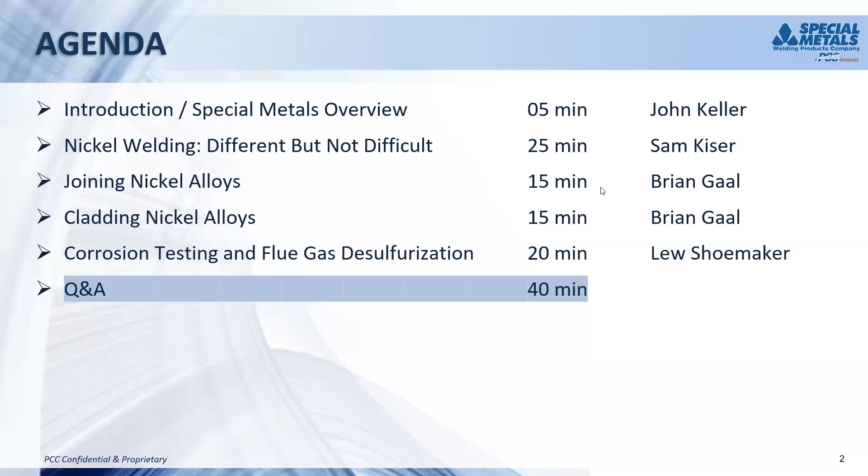Special Metals has been around for over 100 years. On the welding side and on the manufacturing side of the high temperature nickel alloys, we are a leader and innovator, and we continue to innovate over the years and into this new 21st century that we're pushing through. It's something that we take great pride on, but also not just our quality and brand of our material, but the technical expertise that we have and we instill and we put in every day. And I think you'll be able to get a lot out of that through both the presentations and the Q&A session from our technical team, Sam, Brian, and Lew. And so we hope this is a very beneficial opportunity for everyone, and hopefully we can do this more going forward. So without further ado, I'm going to go ahead and play a quick intro video here.

You are playing the video? John, is everybody seeing the video? Yeah, no, you started. Are you able to see it? No, not yet. John, you might want to stop the share and reshare the screen with the video link. So if you're playing the video, stop share and reshare because we're just seeing the presentation. Okay, stop share and then reshare the video app.

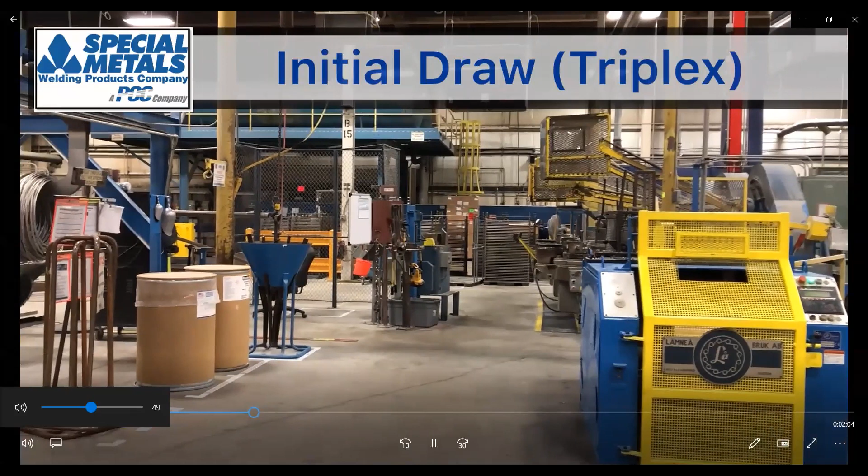John, there is no sound in the video. In case there isn't, you might want to just tune up your audio output. Okay. Stop share, tick mark, and then restart.

Bottom left, you said you were not getting the audio with that, correct? Yeah, there was. Bottom left. No. Okay, one second. I see it, I see it. Okay, sorry about that, we'll try a third time. My apologies. No worries. Good? Yep. Yeah, now it's okay.

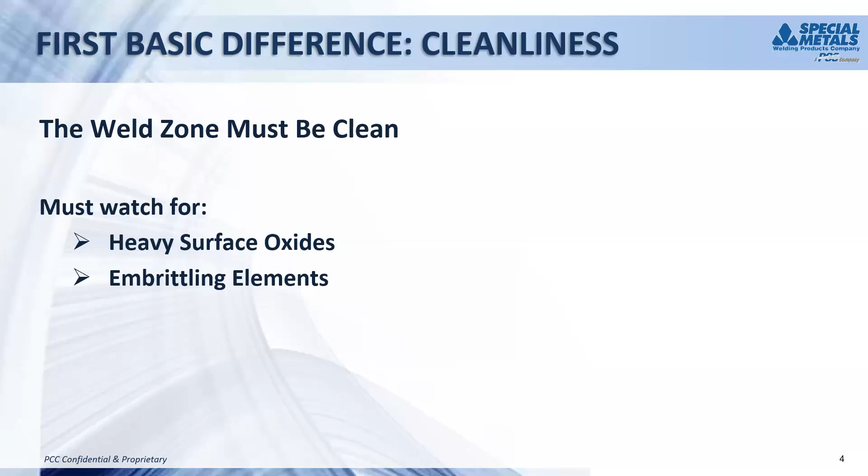If you compare that with steel or the iron oxides, iron melts at about 2798, and iron oxide FeO is about 2588, and iron oxide Fe2O3, hematite, is about 2850 or so. So the iron oxides and the iron base metal melt at about the same temperature.

What that means is, you can't talk most welders into doing this, but it's possible to weld right through iron oxide, even hot rolled oxide, because the oxides melt at about the same temperature as the base metal. So if there is an oxide present, you can basically burn right through it, float it out, or even reduce it. That's the first basic difference in cleanliness. We've got to remove the oxides.

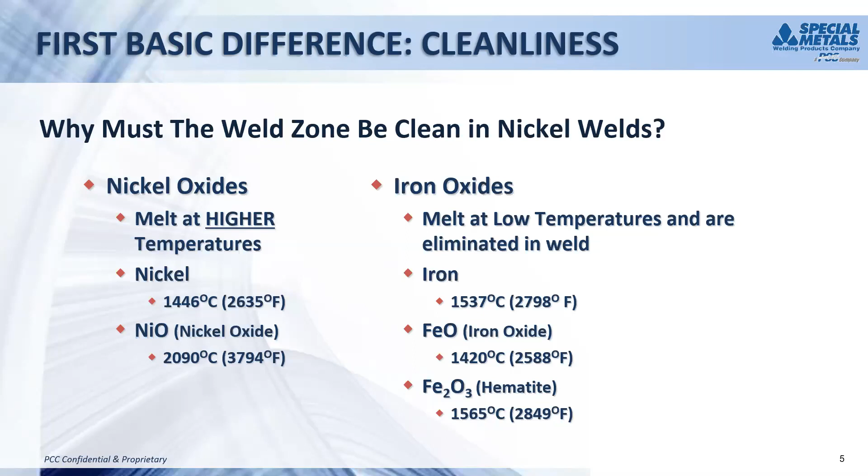We can remove the oxides by grinding, abrasive blasting, and pickling. As for wire brushing - do not use wire brush for this. Wire brushing will not remove the heavy, tenacious oxides that attach themselves to nickel alloys, like in high temperature service or in hot rolling. Wire brushing between passes with all processes is a good thing to do to keep it clean, but if you have a heavy, tightly adherent oxide, wire brushing won't remove it. What it does is shine it up and make it look clean, but it's still there.

The best way to tell this for the welder is to look for a topographical difference. The oxide always floats on top of the puddle, and if it solidifies and attaches itself, there'll be a difference in the topography - a slight upstep when you get to the oxide.

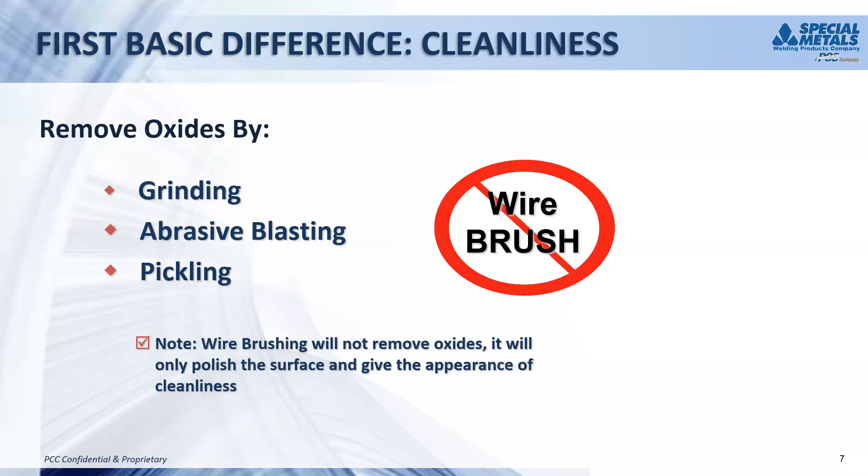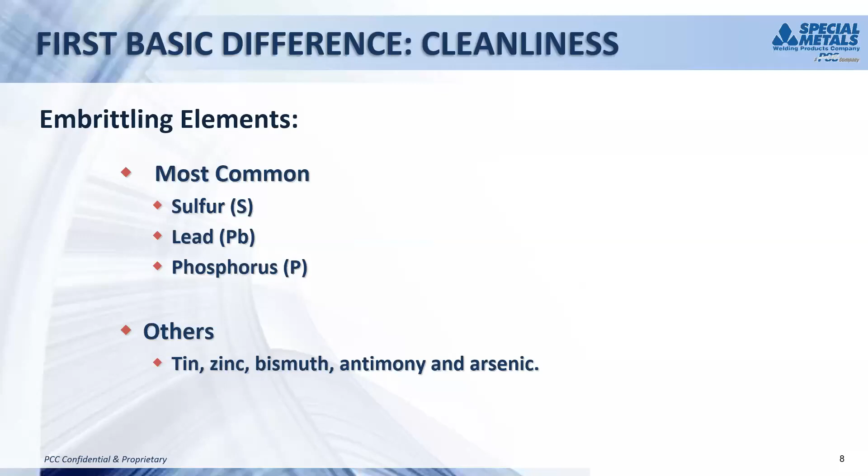The second one is embrittling elements, and the most commonly encountered are sulfur, lead, and phosphorus. But there are plenty of others: tin, zinc, bismuth, antimony, and arsenic. The 'and' doesn't mean arsenic is the last one - there are plenty of others. So you just need to watch out for foreign materials that might be on your plate before you start to weld.

These are various sources where you can find contaminating elements - probably ones we've seen are temperature indicating sticks and marking crayons. I had a visit with a guy up in the lumber territory, and he was using a great big yellow crayon that said right on it that it had lead oxide in it. So it's a potential problem. Another one - a fellow was setting tubes in a tube-to-tube sheet arrangement, and he was bumping them into place with a lead hammer. So there's just all sorts of sources of contamination.

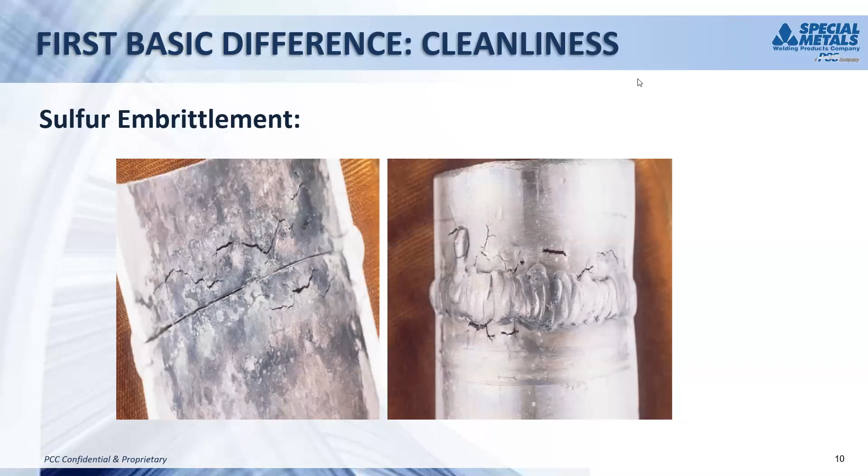This example is probably the worst we've ever seen, so we wanted to put it up. This is a nickel 200 tube, and nickel is typically used a lot in the caustic industry. You can see there was sulfur on the surface of this material, and it was TIG welded, sort of, but you can see the kind of cracking that you get. So sulfur forms a eutectic with nickel and forms low melting areas, and it just kind of falls apart while you're welding.

Several of these contaminants, like sulfur and phosphorus particularly, form eutectics, which are lower melting point combinations than the base metal. So they're the last to solidify, and they can cause you big problems. The others are low melting point metals. We didn't have mercury on our list, but it is possible to have mercury contamination, and it's a liquid at room temperature, so you can imagine what mercury would do to your material. Anyway, just keep it clean. Get it clean and keep it clean.

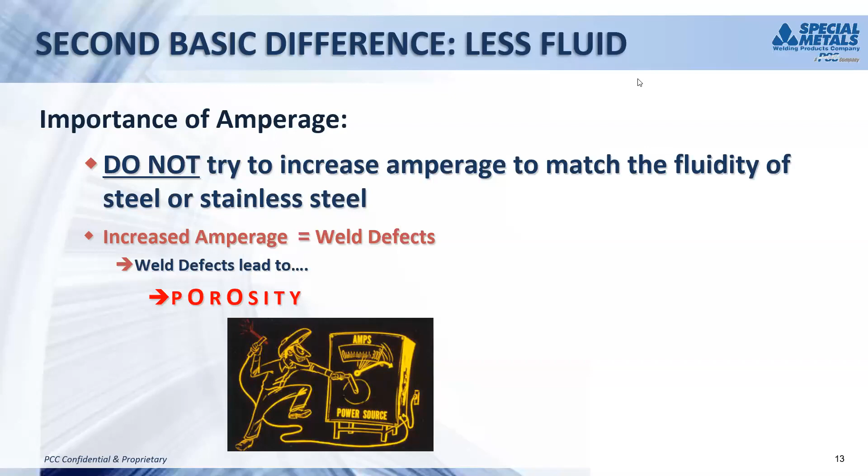So what we have to do, instead of turning the amps up, is use a weave. It should not exceed 3 times the core wire diameter. So if you're running an eighth inch rod, you don't want to weave more than 3/8 of an inch. The main thing, very important, is to hesitate at the end of each weave to fill in the undercut. We'll show you a picture in just a minute.

But what happens is the slag, designed with a low viscosity, will fill up that undercut. Maybe some of you have experienced that in the live welding forums we've had. We'd always ask, hold your hand up if you've had wagon tracks before. It's amazing, probably 30 or 40% of the audience would admit to having wagon tracks in their first welds.

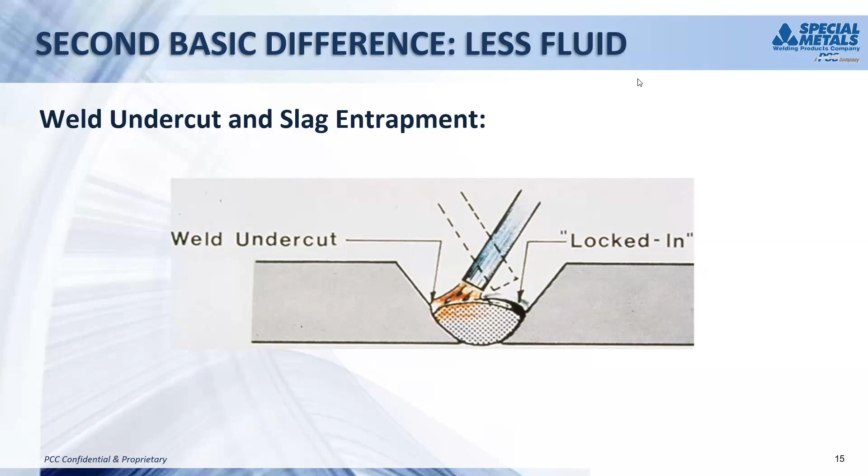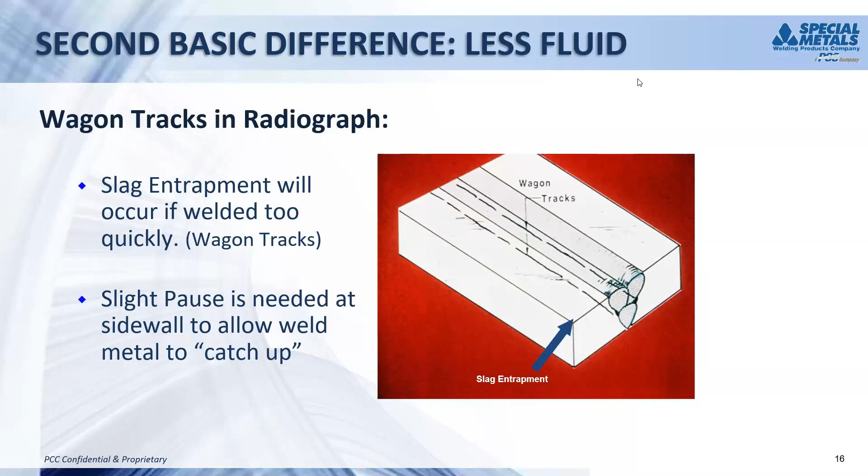Here's a picture of what is causing wagon tracks in your x-ray. The wagon tracks are those intermittent straight lines along each side of the weld, somewhere down in the weld. Notice at the end section there's the place where the slag trap is being caused. That's what happens if you weave too fast. So you need a slight pause: weld here and hold, weld here and hold, weld here and hold, and so forth, because of the puddle viscosity.

So the third basic difference is less penetration. And now what we're talking about is when we're welding on nickel alloy base metals. There is considerably less penetration in nickel alloys than in steel.

I remember when I was first learning to weld in the weld lab, the guys had a plate set up for me. They threw the weld rods down on the table and laid a grinder there and said, if you don't make any mistakes, you won't need this grinder. And you can imagine how many mistakes I made. But one of them was from trying to burn out a tight groove created by a rolled over bead. You cannot burn that out like you do with steel, so you have to grind it, open it up.

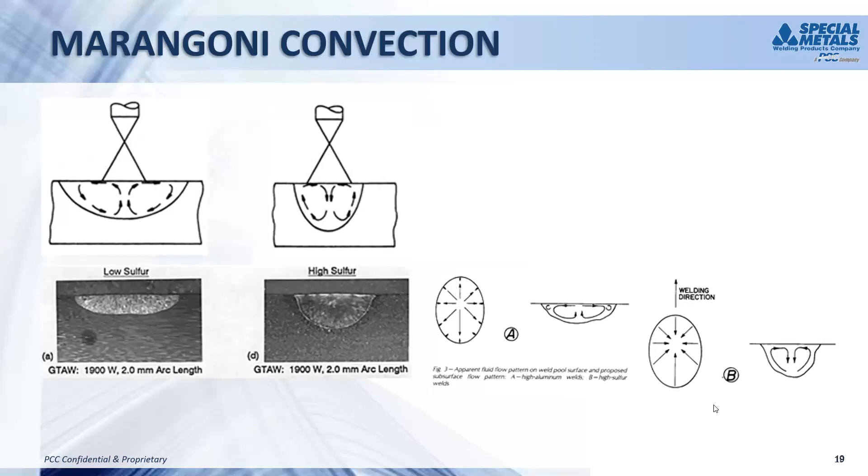Next slide, John. So the whole idea is this is a basic difference between nickel and steel. Don't try to change it, accept the lower penetration, and we have to make allowances for it.

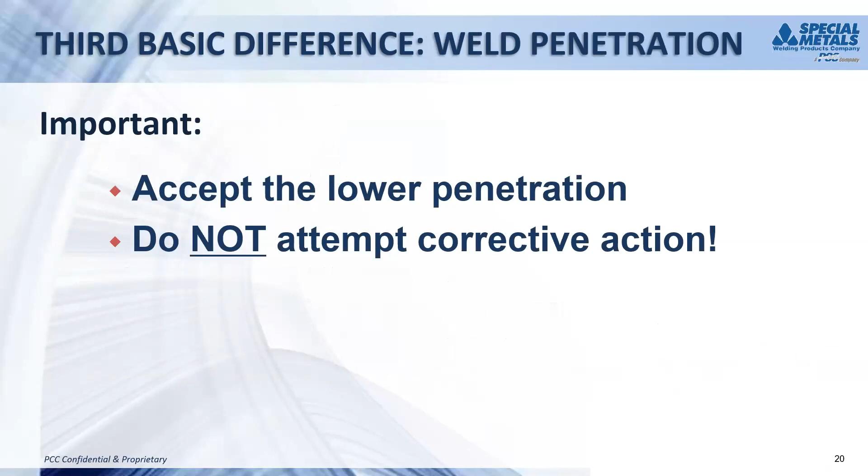One of them is, next slide John, well let's see, I guess we'll get to the groove dimensions and groove geometries later. But the fourth basic difference is the convex bead shape requirements.

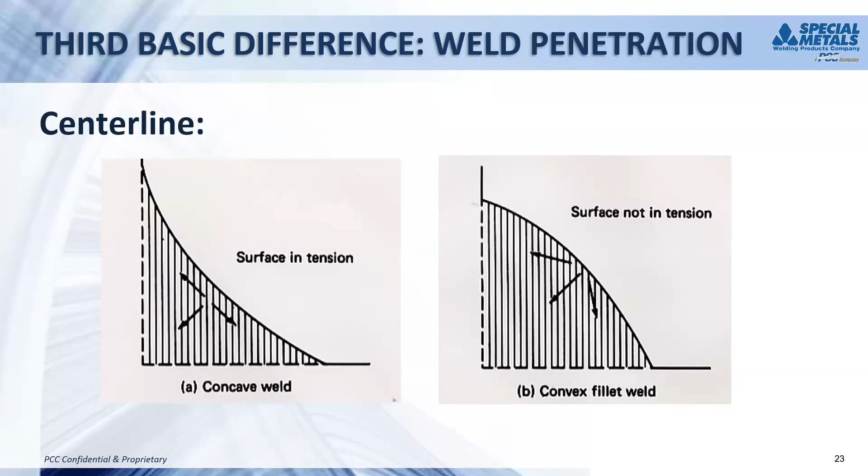Next, John. The reason for this is that if you have a concave weld, you've got the surface in tension, and so the last to solidify, the centerline, is the one that's most easily pulled apart. If you have a convex surface, then it's not in tension, or at least it doesn't have the full dose of tension, and so it's much more resistant to centerline cracking.

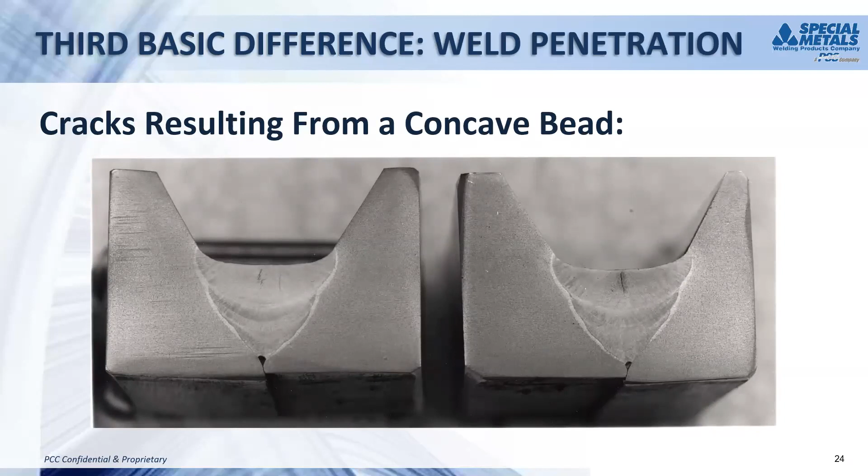Other parts of nickel alloy welding are not any more difficult than steel, actually simpler. Most nickel alloys, at least the solid solution nickel alloys, are single phase from melting all the way down to sub-zero temperatures, so interpass temperature is not critical usually.

Now with the stainlesses and those that tend to form carbides, it's much more different. Steels that form multiple phases like martensite and cementite are much more critical than nickel alloys. Generally, with the solid solution nickel alloys, you don't need any preheat.

And secondly, you don't need post-weld stress relieving. Now, there are some applications where you might get into stress relaxation cracking, and you will need a post-weld stress relief for those, but typically you don't really need it. And finally, the cooling rate is not critical, so we keep a bucket of water if we're welding on something that is not critical. We just dunk it in the water to keep it cool so we can keep welding.

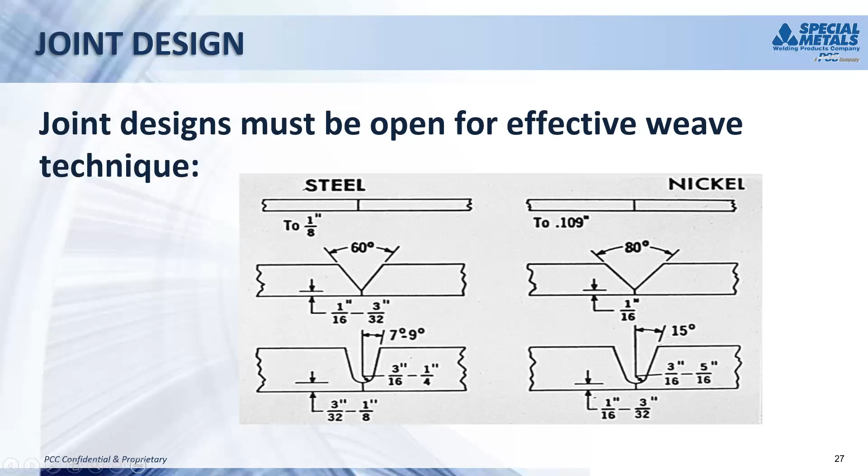So what do we need to remember when we're welding nickel alloys? We got to keep the weld zone clean. When we made the alloys, we made it with low sulfur. Please don't introduce any more sulfur.

We have to manipulate the weld metal with a weave technique, and that weave technique has to include a brief hesitation at each side to let the puddle catch up with the arc. And we've got to accept the inherently lower weld penetration that you get with nickel alloy base metals.

We have to open up the joint and make thinner lands. And the next one is we've got to maintain convex beads, and we have to remember to backfill our craters so that we have convex stops. But if we remember all these things, then we hopefully will become a successful nickel alloy welder.

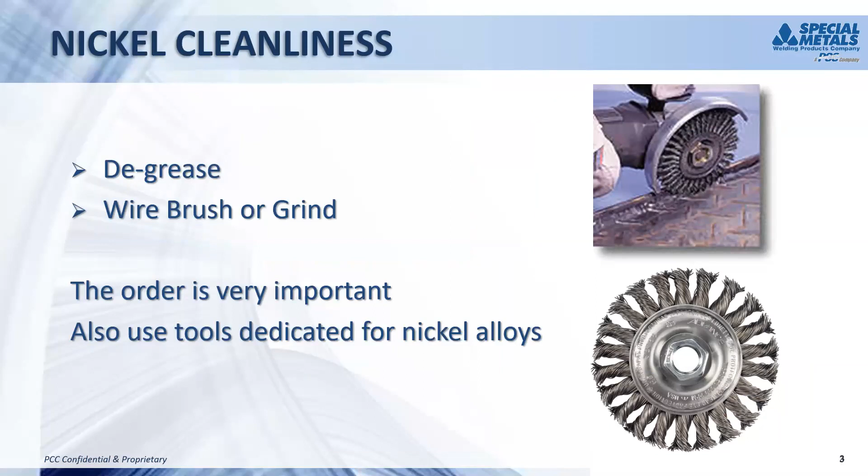Basically, we just want to remind you guys, degrease, remove all those oxides before you put a wire brush or a grinder on there. If you don't do that, you're going to potentially contaminate the grinder, and as you remove the oxides, you're going to be depositing some of the other surface contaminants that may be on there. And then we'll talk about shielded metal.

These are kind of just some high level advantages and limitations. The big thing to remember is, if you're doing a small little repair, shielded metal may be a very practical way. You don't have to pull out a lot of different cables. You don't have to worry about shielding gas. You can do this outside. It's not the highest deposition rate, but it's still a very good way to do a small repair with minimal setup.

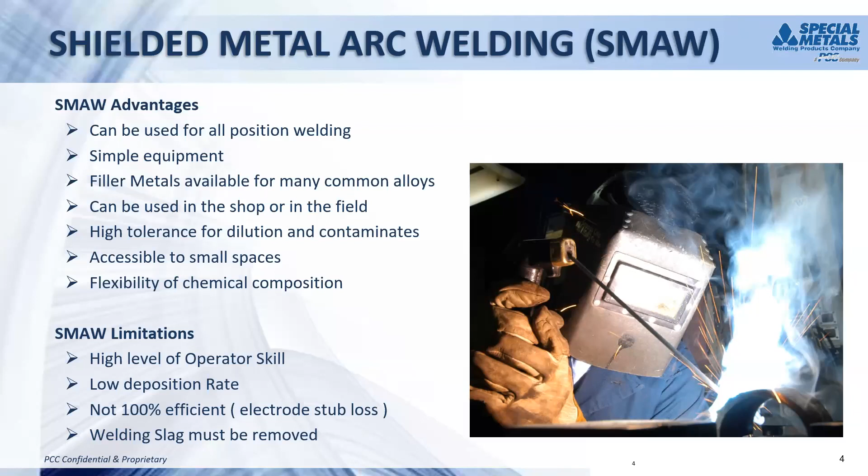As people started getting some experience and some hard lessons learned, they have actually adjusted the inverters to be more friendly to nickel alloys because of the higher resistivity in the core wire. To the point now, you can actually get a much smoother, more controllable arc with an inverter than you could in the past. But again, that's something to just be aware of, that difference in power source can cause a little bit of adjustment in parameters. The newer inverters weld a little bit smoother, a lot better with the nickel alloys than in the past. And that will affect the performance of a stick electrode, not negatively, but just something to be aware of, that there is a difference.

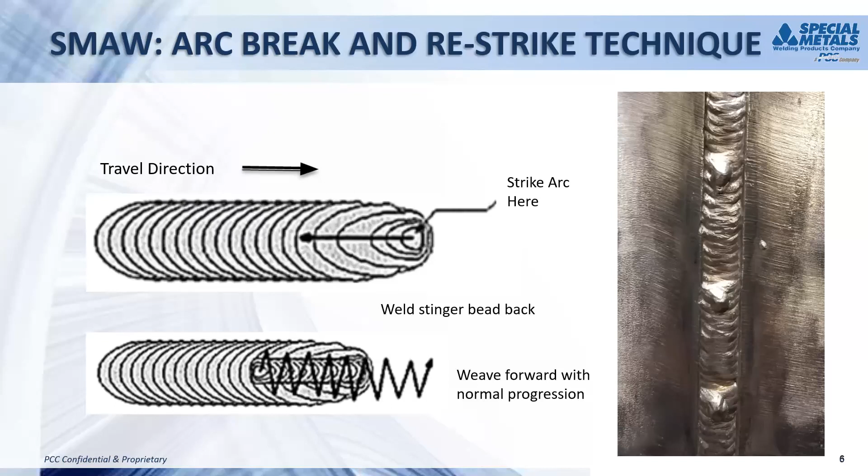All right, now we'll kind of skip over to some gas metal arc welding, or MIG welding. This is probably gaining a lot of steam in the last few years with the nickel alloys because you can do much more continuous welding. We're now starting to put wire in drums, so you can do, not thousands of pounds, but at least 200 to 500 pounds, without having to change a spool, of continuous welding. Obviously this gives you faster travel speeds, much higher deposition rates, so you can put more metal down.

Even with the proper equipment, you can still go all position. We're talking something like a pulsing type power source. You can run the solid wire vertical up or overhead. With those advantages, you've got a little bit more limitations: much more complicated welding equipment, a lot more things to check before you get started to make sure everything's set the way you think it is.

The big productivity gains are not always recognized on thinner materials, at least with manual welding. Another advantage of gas metal arc welding is it does automate much easier than a stick weld or shielded metal arc welding. So that's where we're starting to see things like robotic welding come into place and be used even in the automotive industry with some nickel alloys.

For example, automotive exhaust systems where they're trying to extend the warranty, one of the weak areas was the weld. So they're now going to a much higher nickel alloy for that weld, which makes it a much more robust process.

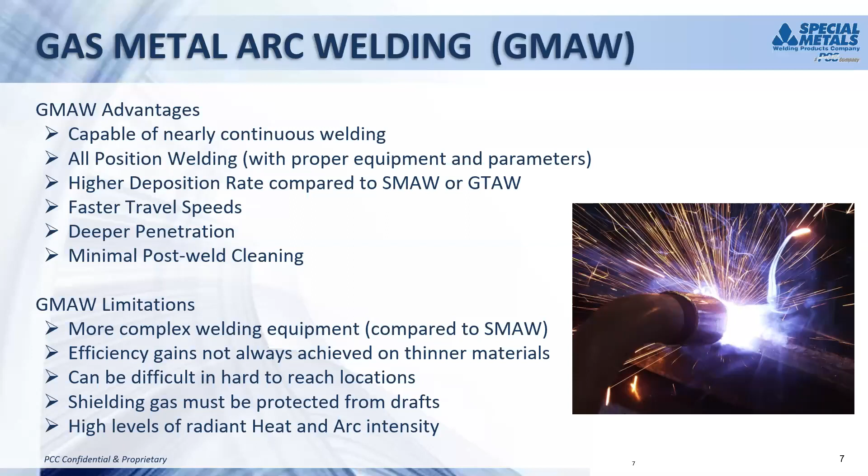One of the number one complaints I've always come across with gas metal arc welding is wire feeding problems. I can't tell you how many times I've gone out to places having issues with wire feed.

The biggest reason for the trouble is nickel alloys have a wide range of stiffness, due to their cold working rates. Nickel alloys can go from very minimal cold working to something that cold works incredibly quick. So as we process these, that can lead to a wide variety of stiffness levels in the finished wires.

For example, nickel 1, commonly used for buttering, may be very soft. You may have to adjust your settings, shortening that torch lead, all the way up to 625, which can be very stiff, and you can get away with much longer weld leads and do a little bit more with that.

But you do have to make sure you've got the wire feed with enough torque on that motor to push those longer lengths. One of the big tricks I've seen used commonly with robotic welding is adjusting your roller types.

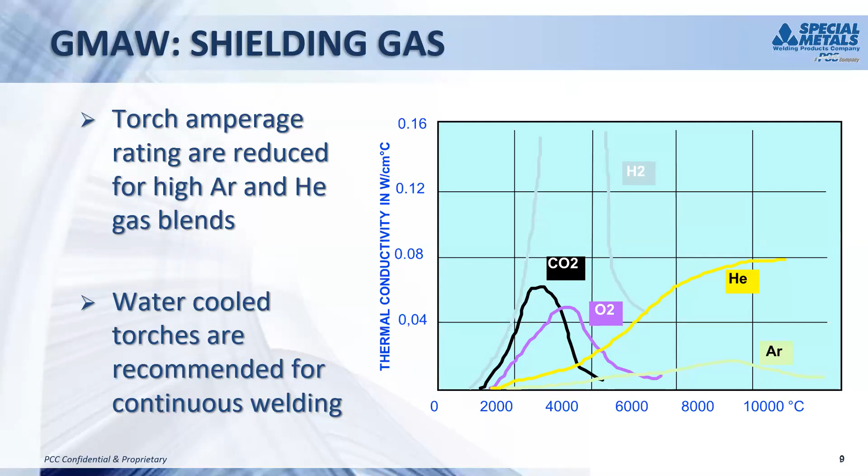Some of the common defects that are a little more unique to gas metal arc welding with nickel alloys, as Sam mentioned, one of the big problems is lack of fusion. It's very easy to make a MIG weld that looks real pretty, where you're just kind of laying on the surface, but those surface oxides and other nuances of nickel welding really play against that when you get into gas metal arc welding.

So you need to be very cautious, just like with a stick weld, making sure you burn into that sidewall and let it fill in. You want to do the same thing with the MIG weld - make sure you're burning into that sidewall.

For anyone doing robotic welding - sorry, John - rollover can be a very big problem in tight corners with robots. With steel wires, it's pretty common to do almost a 90-degree turn with those robots without breaking arc, because of the fluidity of the steel. When you get into the nickel alloys, they're just not that fluid. You have to be more careful, and sometimes in a very sharp corner you may want to break the arc, pause for just a second, to avoid buildup as the robot arm turns and doesn't really move the puddle - it just kind of rotates to get around that corner.

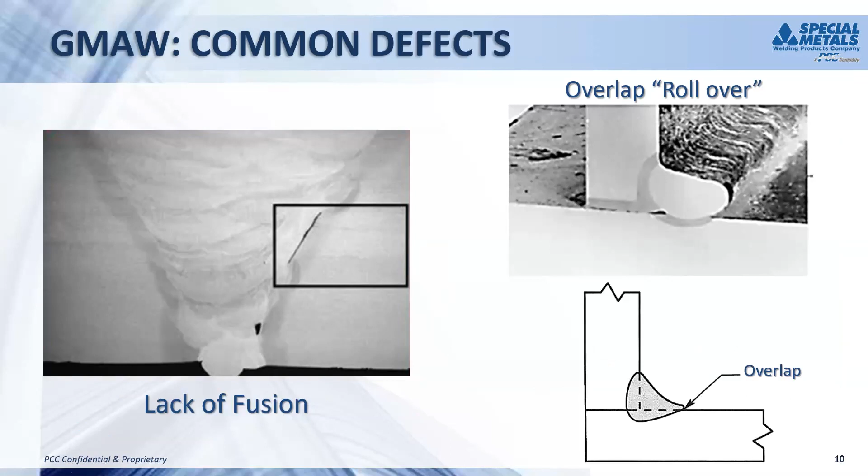Gas tungsten arc welding is probably one of the most preferred welding processes from a mechanical standpoint with nickel alloys. It has the advantages of very pretty, high quality welds with very minimal spatter. You have one of the few advantages where you can do an autogenous weld, with no filler metal, or you can add filler metal in multiple ways - manually dipping the filler metal into the puddle, or setting up a wire feeder to feed wire in at a controlled rate, which helps increase productivity and deposition a bit, though there are some nuances to work with.

The other thing is the limitations - you do need to be very protective of that shielding. Things like drafts or open windows can cause problems where you temporarily lose shielding, and then you could run into issues like porosity. Even if you don't get full porosity, you can get some oxygen induced in there and end up with nickel oxide that's pretty tenacious. People who have done a lot of mechanized gas tungsten welding are probably familiar with the term floaters. If you lose temporary shielding, you can create floaters, which can be very problematic because, as Sam mentioned, they're very high melting temperature oxides that won't be vaporized by the tungsten torch.

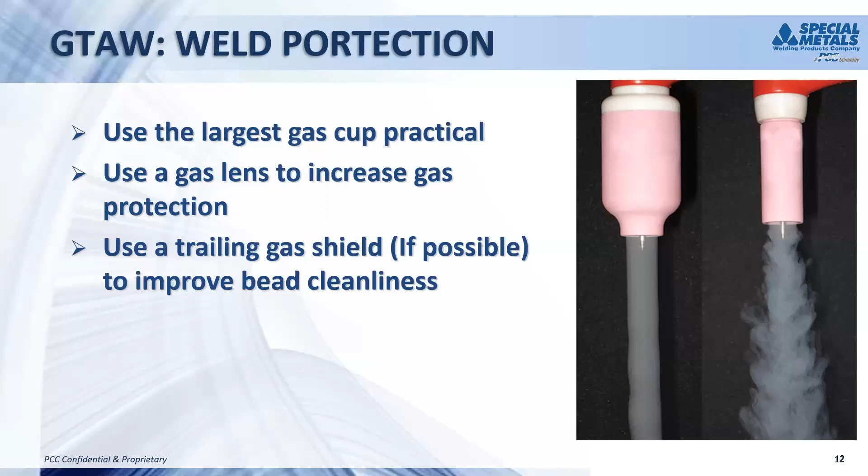Okay, so submerged arc welding is probably one of the least utilized, in my opinion, for nickel welding. It can have very high deposition rates. You've got very good weld protection because the arc's submerged and encapsulated in the flux. It does require a little bit more equipment, and it's not always practical in all positions. It does work out of position, but it's just not very practical to figure out a trough to support that flux if you want to weld overhead. But again, it can be used with many nickel alloys.

The one caution I will point out, and this goes for shielded metal arc welding as well, is that any nickel alloy relying on a precipitation strengthening mechanism, such as a gamma prime or gamma double prime, you may run into some problems trying to use any kind of flux-based weld process. The aluminum and titanium, which are really forming those strengtheners, have a very high affinity for oxygen, and they tend to end up in the slag as opposed to staying in the weld metal. So you can lose a lot of those goodies, the aluminum and titanium that provide the strengthening from the gamma prime.

The other thing to be aware of, on that same note, is that you do tend to burn out some of the niobium and the chrome when you're doing submerged arc welding. So you need to be cautious that you're getting all the strengthening elements in a solid solution alloy that you think you're getting as well. Next slide.

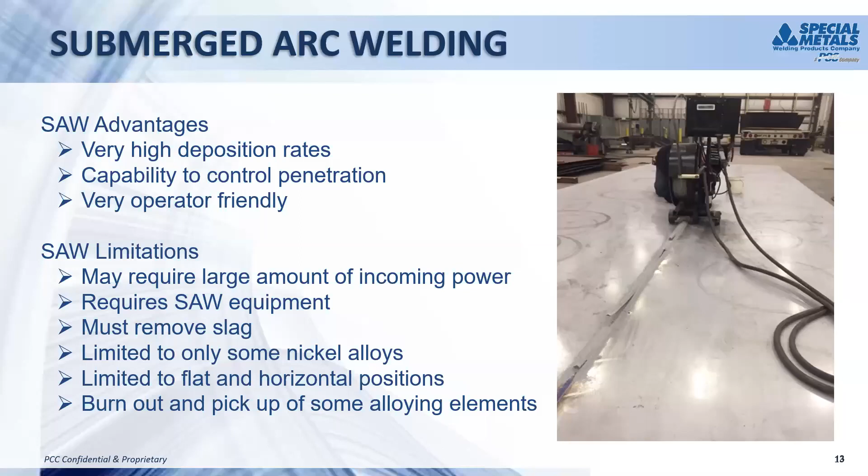One of the biggest problems I see coming up when it comes to nickel welding is the flux burden, or the level and height of the flux that's used. With steel, it doesn't seem to really bother it if you kind of just completely bury the arc. If you ever see flash, you'll see guys with scoops, just throwing more flux onto the weld to cover everything, and it doesn't really seem to cause any problems.

But with nickel fluxes, you typically have some outgassing, so you have to balance that height. If the burden is too high, you can trap some gases. There's some weight of that flux that can actually depress the nickel metal, and you get some very interesting phenomena where the metal will actually be oozing out the sides of the weld, and you've got flux coming out the side too, and it just makes a very big mess where you don't typically see that with a steel submerged arc flux.

If that burden is too low, you tend to get a little bit of arc flash. Too much of that can be detrimental to operators. But there are a couple scenarios with some particular nickel alloys that solidify very quickly that most guys running submerged arc actually want to see just a hint of arc flash coming through, because they want to just barely cover that weld puddle so they don't trap any gas. They give it as much time as possible for the gases to outgas on that weld, so they don't solidify and trap it and get porosity.

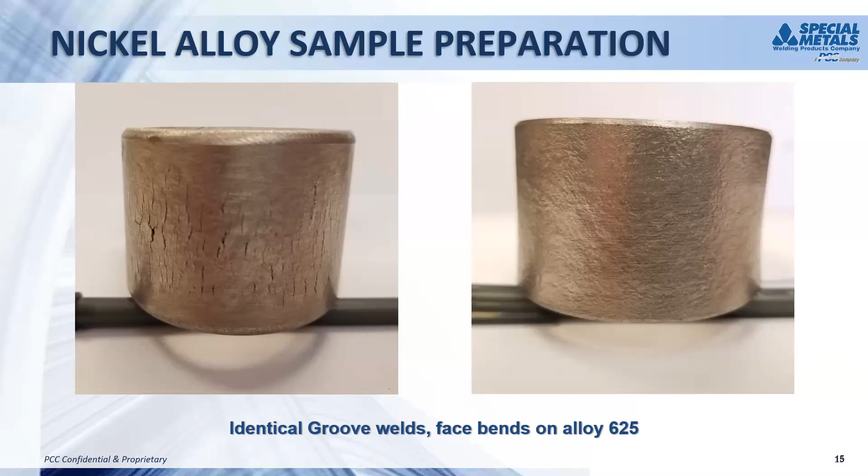Now we're going to talk about a little bit of nuances for cladding nickel alloys. Again, remember all your basic fundamentals. The biggest thing I can always point out to everybody is, more often than not, something is overlooked with shielding gas that causes problems, versus a big issue like not having a groove prepared correctly or using the wrong wire. It's not as common to come across those; somebody forgetting they've got a hole in their gas line or something is a much more common problem.

As we talk about the difference in what we're doing when cladding a piece of equipment versus joining a piece of a component — the reason we're cladding is primarily for corrosion resistance, not for adding strength. We want to use a less expensive steel for the structural component, and then clad a layer of nickel alloy to protect that steel from the environment. So we're worried more about corrosion resistance and matching, whereas when joining, we're worried about matching the strength, so that weld has just as much strength as the rest of the component.

When we're cladding, we typically try to go after low penetration — we really don't want a lot of mixing of these two metals, we want to minimize that. Where we're joining, we really want to burn in there, so we make sure we get a good, uniform weld metal. On the cladding side, it's not uncommon to see direct current electrode negative, or straight polarity, or an AC, to minimize the heat going into that base metal.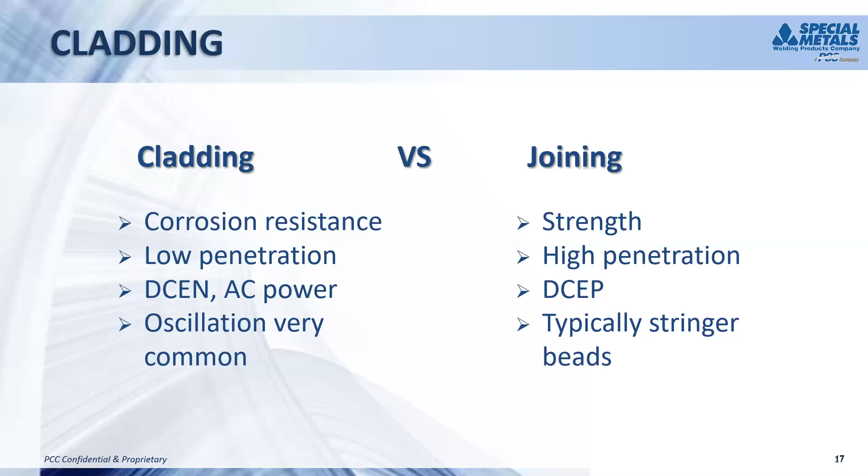Next slide. The other thing, as we mentioned, is oscillation. Be aware of the different types of oscillation equipment and make sure you're matching the oscillation equipment to your welding process.

Things like a pendulum oscillator actually rotate something like this. It works very well for gas metal arc welding because of the forgiving nature as that stick-out arc gets a little bit longer. However, if you're doing something like a TIG process, as you pivot like that you actually create a longer arc and change your parameters a little bit, versus a straight line that goes back and forth with the same arc length the whole time.

The other thing is to keep in mind some of the variables you can typically adjust in an oscillation. You can adjust the ends of that weld, whether you're trying to minimize one side versus the other, to put a little bit more metal where you don't have a bead versus the side you're tying into. Again, there's no right or wrong process, just be aware of the differences and nuances and make sure you're applying the best type of oscillation for what you're trying to do.

Next slide. Some tricks to minimize dilution. Weld bead step over when you're doing cladding is probably the biggest and best trick. The closer you put the weld beads together, the more you're actually burning into the previous weld bead and not the base metal, so you can minimize the dilution and burn less of the base metal.

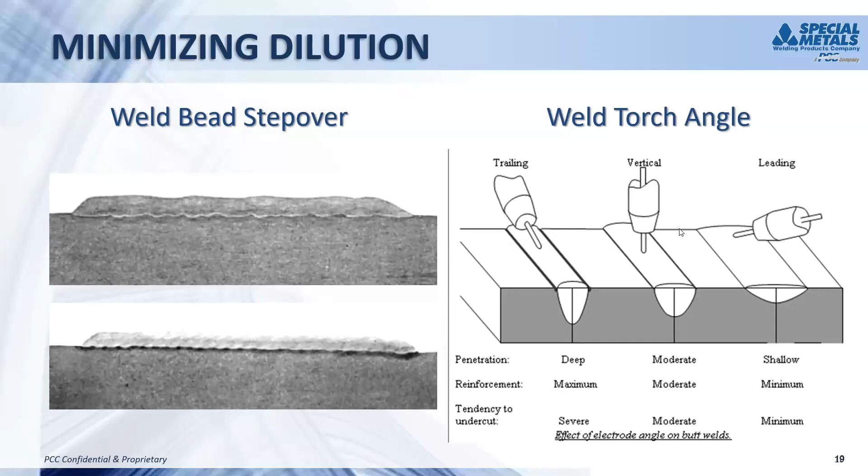Next slide. So one of the first places this was really used in industry, which I believe goes back to the 70s in the United States, was municipal waste burners. Historically, these water wall tubes were made with a low alloy steel, something like a 2 1/4 or 1 1/4% chrome alloy, and that worked fine under most situations. Then we started burning some of the municipal waste.

The fume and the byproduct got much more corrosive, and as you can see in the picture, we started seeing very quick erosion and corrosion rates on these steel tubes that were causing some serious problems. So one of the solutions was to go back into those existing plants and just clad the entire water walls with the nickel alloy that gives much better protection compared to the steels.

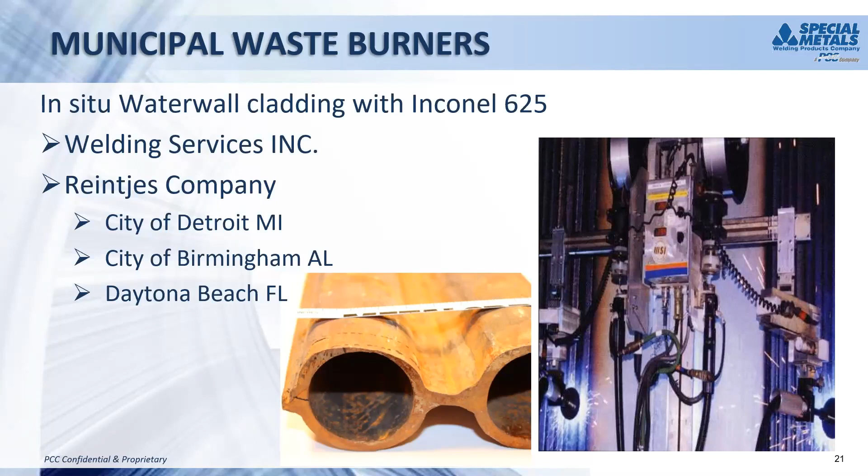Where that's commonly done is in a vertical down MIG process, as you can see the piece of equipment on the right, which does a very quick weave back and forth vertical down to just cover a very thin layer of nickel over that alloyed steel, which really gives it substantially better corrosion protection. Next slide.

Another very commonplace popular area for Inconel 625 was in the oil and gas extraction industry. A lot of the different low alloy component pipes and valves were clad with 625 to really protect and extend the life of those valves, where if you made the whole thing out of steel, you'd start seeing some pitting and corrosion very quickly around some of those seal components, which would cause them to fail very fast.

The other requirement that came out of this was NACE MR0175, which actually puts a limit on the iron that's allowable at the surface on these nickel clad welds. This really led to the development of a low iron Inconel 625, which is pretty much the standard for welding filler metal now, at best only having 0.5% iron in that wire. That really helps minimize the iron dilution, or minimize the iron level at the edge of that clad surface, so you have more nickel and less iron, and therefore more corrosion resistance.

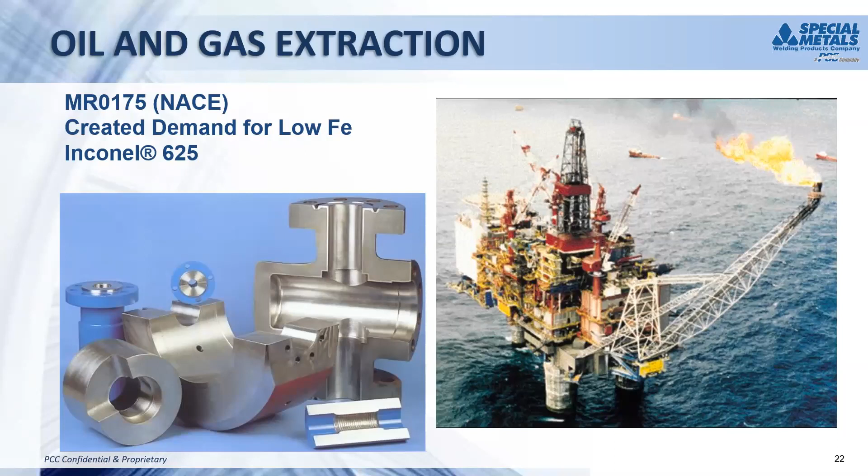One of the other big applications in the United States was the high chromium, 30-ish type chromium nuclear alloys. Historically, a lot of the welds on nuclear power systems in the United States were welded with an Inconel 82 or 182 electrode, which is anywhere from about 14% chrome all the way up to maybe as high as about 20%.

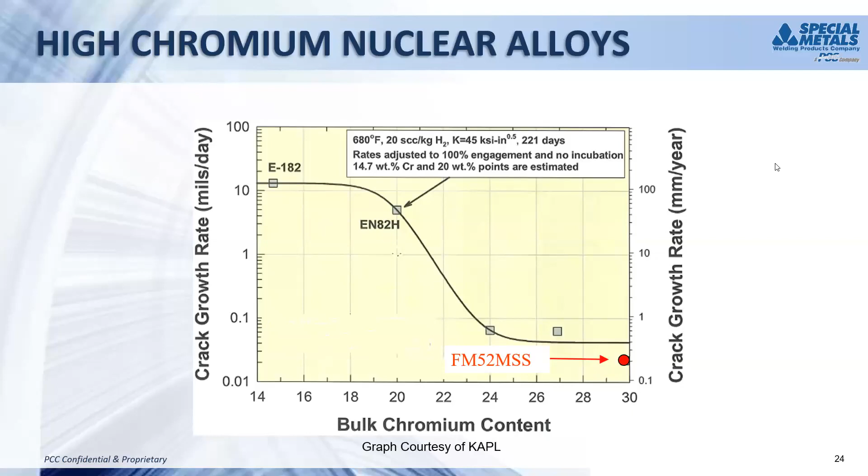One of the simplest ways to mitigate this was to simply cover that entire weld joint with a much more corrosion resistant alloy like an Inconel 52M or 52MSS, that basically just covers the entire weld and eliminates that potential problem. Next slide.

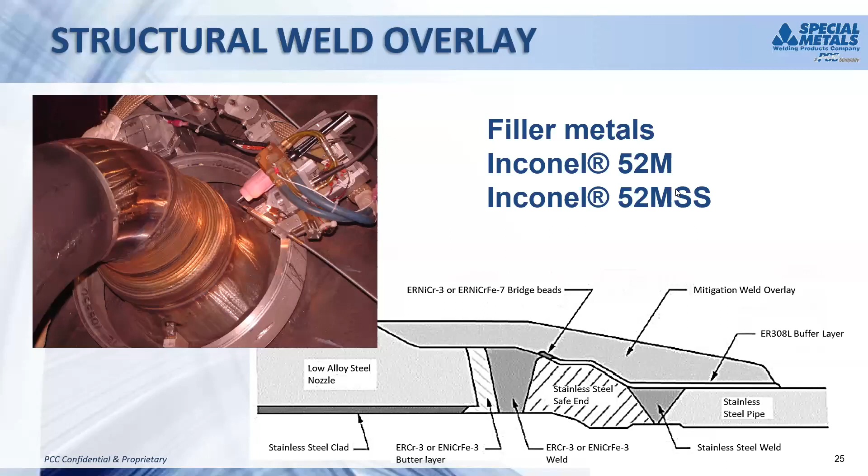Along those same alloy groups, you've got a lot of components that were entirely clad with the 52M and Inconel 52MSS, done with multiple processes. One of the most efficient we'll talk about here is with weld strip.

With weld strip, instead of a single point like you'd have with a wire, you've got a much wider strip, so you're covering a lot more area of a component. That's a big advantage as far as a time saver. But you introduce some things like a lot more heat input, and other nuances that can cause some problems.

I believe this is the actual reactor dome lid that'll be clad with 52M and 52MSS, and then it will be formed into the dome that actually protects the reactor. That alone causes some other issues, which we'll see in the next slide.

So the other big advantage to doing that is tube sheets. The tube sheets come in contact with some of the more corrosive media in a reactor, or just a heat exchanger in general. So when you're cladding for a tube sheet, you run into an additional problem.

All of a sudden your weld metal, after you've put all that clad down and machined it, it's now the base metal. So it's got to be held to pretty much the same standards you would as a base metal. So one of your challenges becomes keeping that sulfur in that weld metal incredibly low.

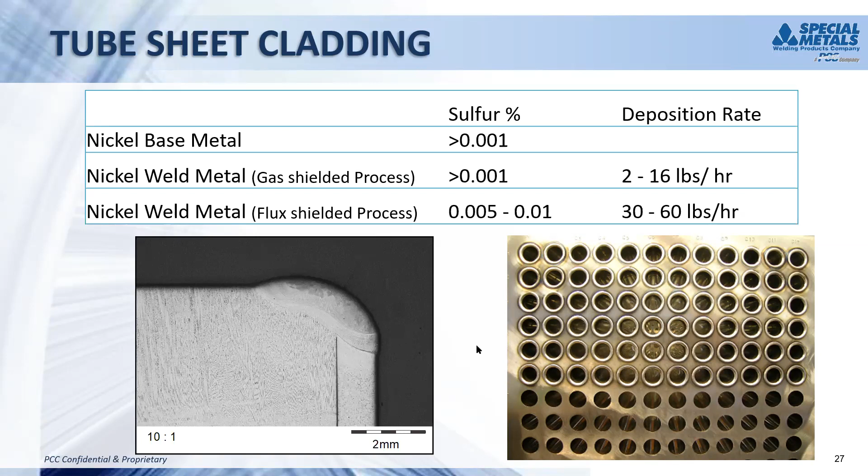Superheaters are another area of a lot of concern. In the United States, there was a Clean Air Act initiated in 1990. A lot of other parts of the world started a little earlier, some a little later, but the overall effect and reason for this was to reduce pollution.

So instead of letting a lot of these nasty components out into the atmosphere, we wanted to capture them and keep them maintained in the power plants. The downside to that is you're now keeping some very corrosive materials contained in the power generating system, which can concentrate and become very corrosive very quickly.

Lew will talk a bit more about that later, but once these low NOx burners were put in place to reduce emissions, you started seeing some very aggressive corrosion rates in a lot of these materials.

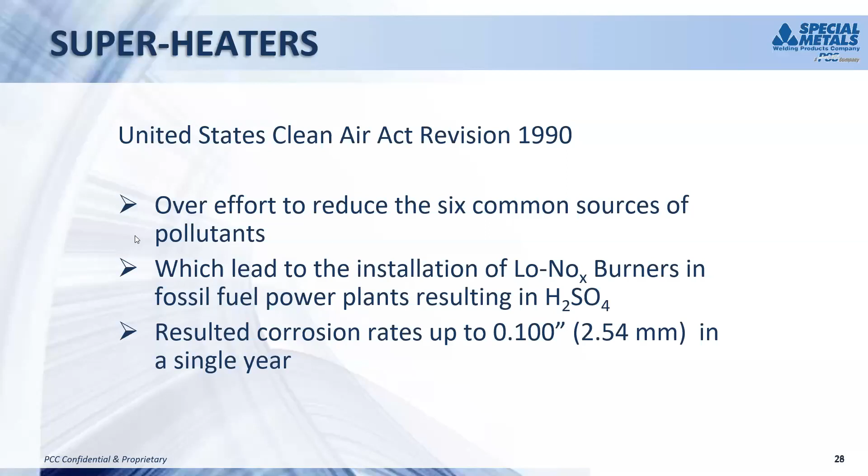In an effort to look at some new alloys, they created that experiment and ran tests with a wide variety of different nickel-based alloys. You can see corrosion rates anywhere from substantially high attack down to the newer filler metals such as the 686 CPT, with incredibly low attack rates.

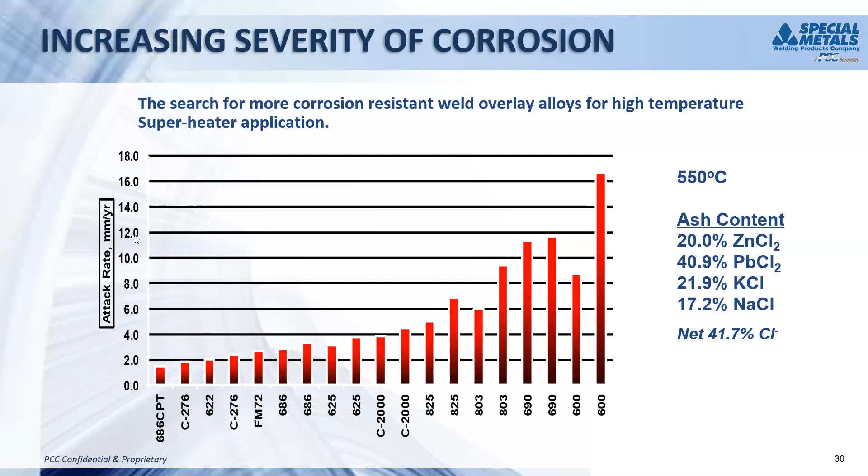But this is just a very good illustration of some different corrosion rates and different alloys that have been used on the superheater locations.

This is another example of some experience that Special Metals had with Inconel 72 on superheaters. As you can see in the picture, the tube shown up front was blasted and cleaned up, but you had some pretty heavy deposits of melted salts depositing on these superheaters. After 7 years of service, there was very little or no attack on the Inconel 72 tubes.

Just one quick mention on that pattern - it's a very specific process used to clad these heat exchanger tubes, which could be a combination of TIG or MIG depending on who's doing the work. There are a lot of different nuances to really minimize the dilution and therefore minimize the amount of metal that needs to be deposited on those tubes. That's probably a whole series of lectures on its own, to really get into the nuances of putting down the smallest amount of metal that still has the corrosion resistance people want.

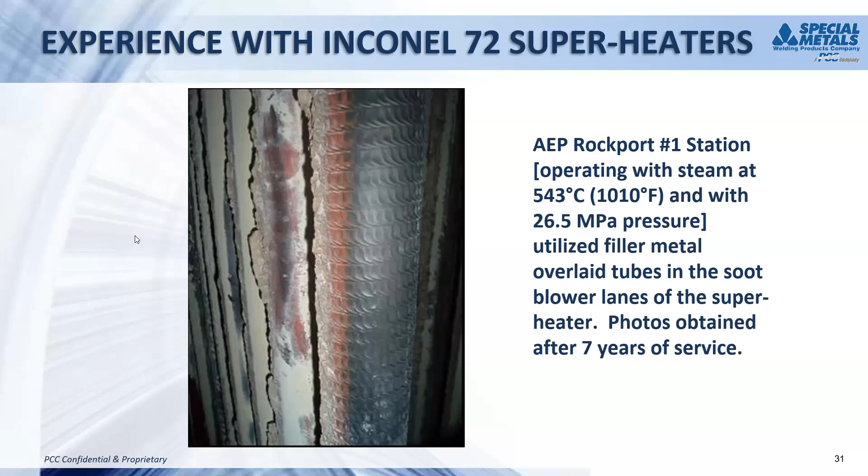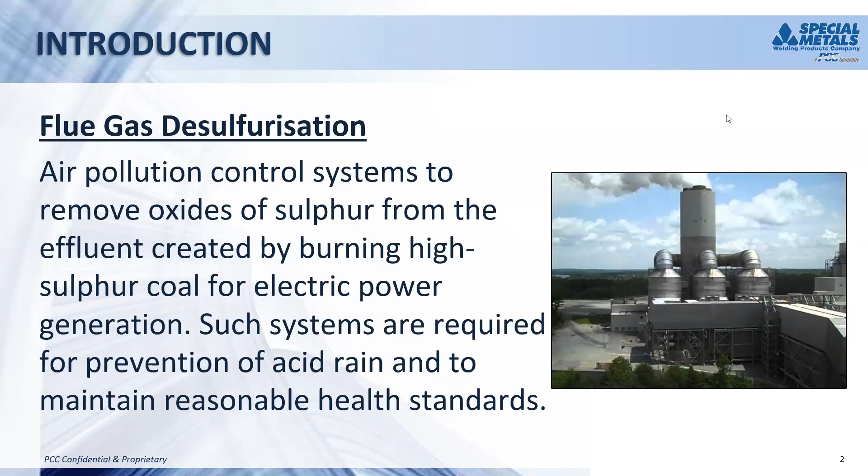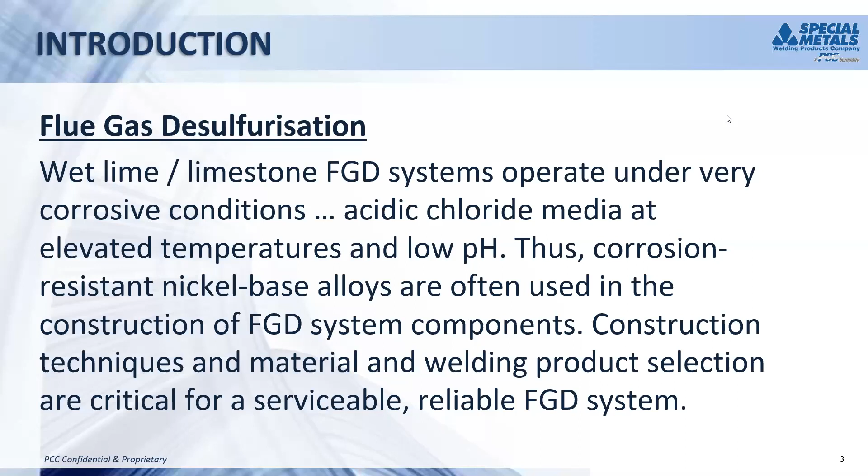The most commonly encountered type of FGD system is a wet lime limestone system, where a slurry of ground limestone or calcium carbonate is mixed with the effluent from the boiler. The SO2 reacts with the calcium carbonate to form calcium sulfate, or gypsum. This precipitates out of the wet system and can be collected and disposed of. Actually, it can be used for producing construction board and road aggregate, so there's a use for the byproduct of that reaction.

This is an example of what can happen when inadequate materials are used for construction of the system. These are two scrubber vessels that were fabricated from 316L stainless steel. After about a year of service, you can see the result: there's leakage of material from inside the vessels coming down the outside, so the walls have been completely perforated by corrosion. You'll also see some smoke up at the top there - that's not supposed to be there. That's the result of leaks caused by perforation of the 316 stainless by corrosion.

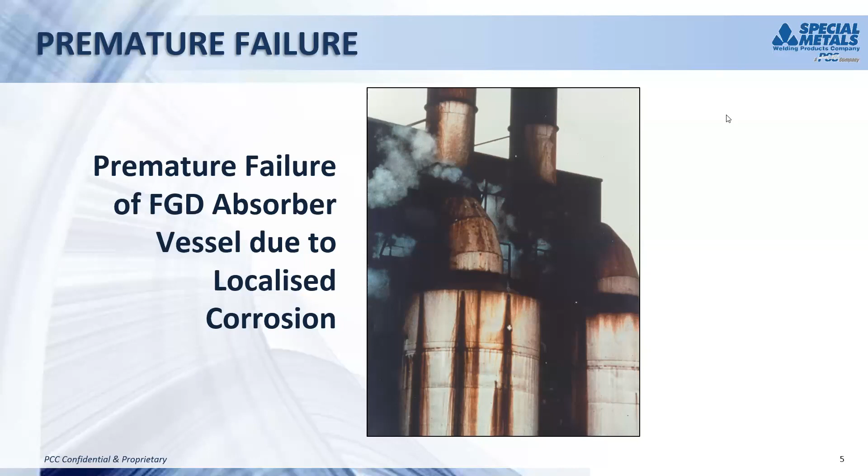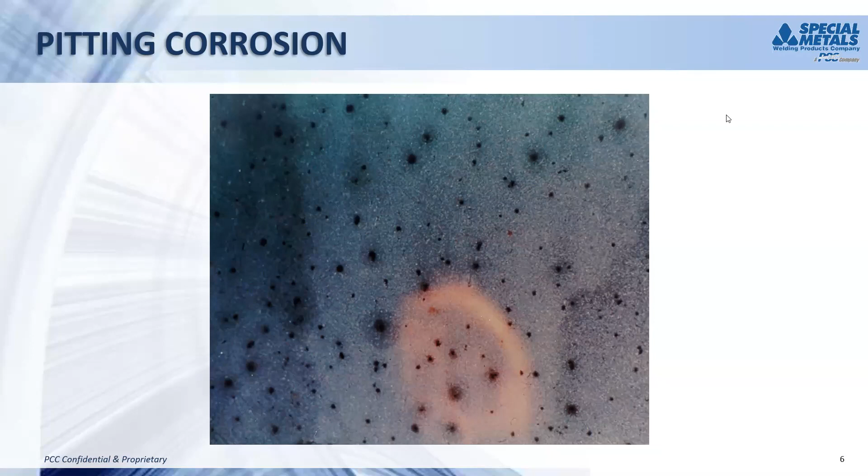Crevice corrosion is another more aggressive type of corrosion, actually more aggressive than pitting itself. We sometimes refer to this as under-deposit corrosion, because in FGD systems, a mineral deposit can form on the wall, and underneath that, the micro environment can be very aggressive. Brian showed a slide of a boiler tube with a deposit there and how the halides - chlorides, fluorides, whatever - can concentrate below that deposit. We see exactly the same thing in FGD systems. So under the deposit, it will be high chlorides, high fluorides, and very low pH, which results in very, very rapid corrosion. The next slide shows just what happened in some operating scrubbers.

Between 2000 and 2006 in the USA, there were 84 FGD absorber vessels fabricated from grade 2205 duplex stainless steel, and all of those failed by perforation by corrosion in less than 2 years. In most cases, the attack was even more rapid than that - some failed in as little as 6 months.

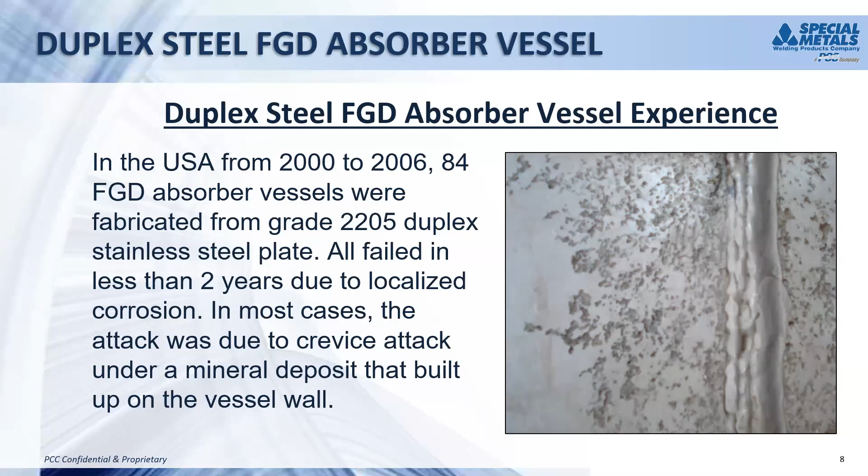This slide shows another case of crevice corrosion. In this case, this is a manhole cover, again made out of 2205 duplex steel. There was a rubber gasket used to seal the manhole cover to the manway, and you can see that ring of corrosion that exists in the center of the cover. The gasket acted like a tight crevice, and the crevice attack formed under the gasket.

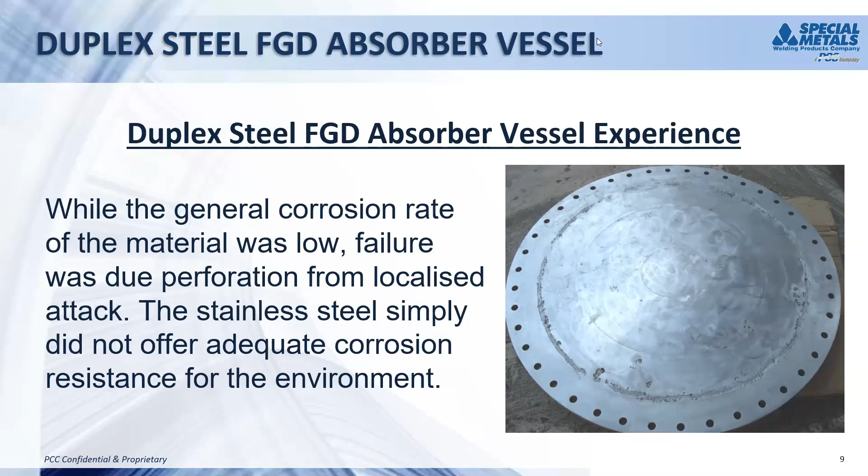There's basically 3 types of construction used for building FGD equipment utilizing nickel-based alloys. They can be solid alloy plate, in which case welding would usually be done by either shielded metal arc welding or gas metal arc welding in the pulse mode of transfer. A way to reduce costs is to use alloy clad steel plate - in this case, the steel part of the clad plate acts as the structural member of the system, and the alloy cladding, typically maybe 1.6 millimeters thick, protects the structure from the aggressive corrosive environment inside the system.

Another way to do that is with sheet cladding. Brian talked about weld cladding - that can also be done by welding alloy sheet over top of a steel structure. Wallpaper is the typical term used for that, but this would be alloy sheet on the order of 1.6 to 2 millimeters.

In North America, we typically use gas metal arc welding for that purpose. In Europe, they tend to use gas tungsten arc welding. So I guess it just depends on what your welders prefer and what they're most adept at using.

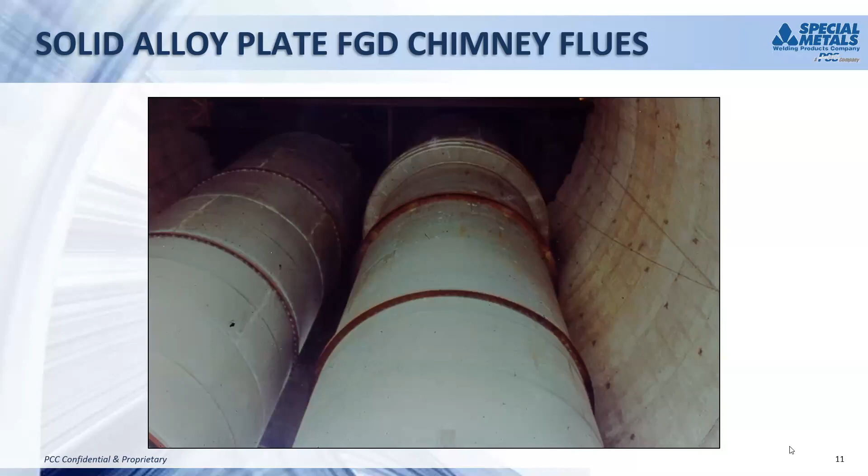These next few slides show some of the components that have been fabricated for FGD systems by these various techniques. These are two chimney flues fabricated from Inconel 625 plate. This chimney is about 1,250 feet tall, so you can imagine there's a lot of expansion that takes place in a structure that long. At the top of the flue on the right, you can see an expansion joint that's used to offset that expansion.

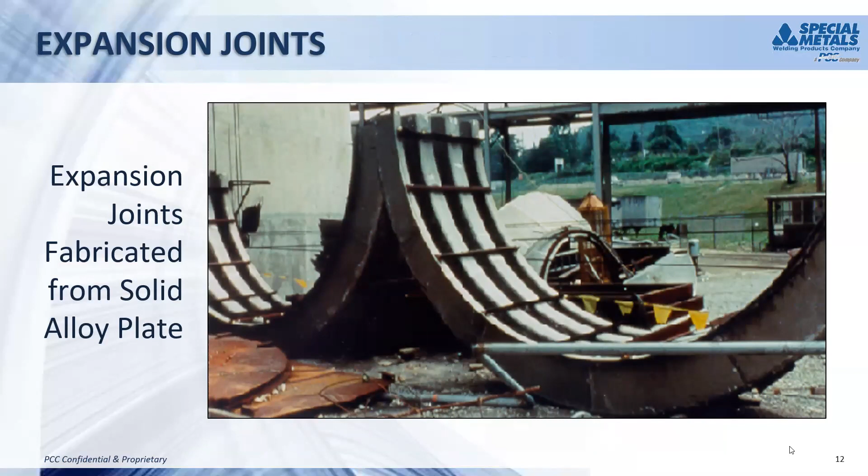The next slide shows an alloy clad steel chimney flue. This is alloy C276 clad steel, and they welded that from a float that moved up and down the center of the chimney. The welding procedures for these, though, are very similar - solid alloy welding materials, both for the solid alloy and for the alloy clad steel plate.

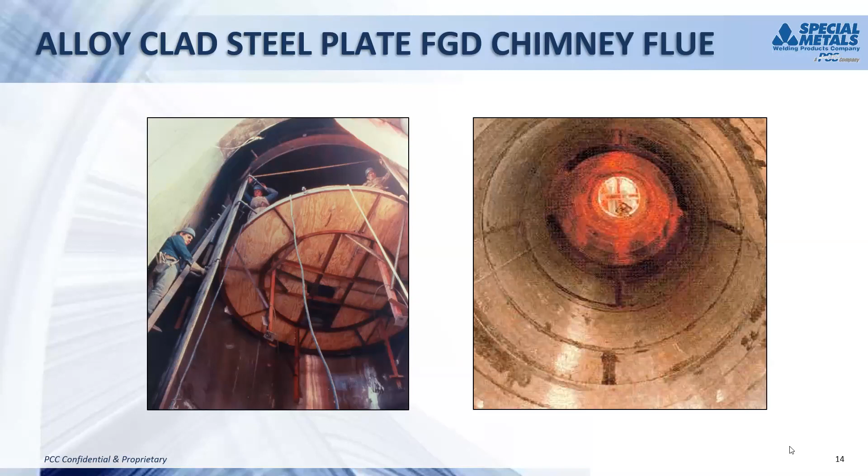The next slide shows an outlet duct that was lined with alloy sheet by the wallpaper technique. This is alloy 22, 1.6 millimeter sheets, about 48 inches wide and about 120 inches long. They were attached to the steel structure to protect the material from the aggressive environment inside the duct. You can see some plug welds in the center of the plates that are used to reinforce the attachment of the sheets to the steel structure.

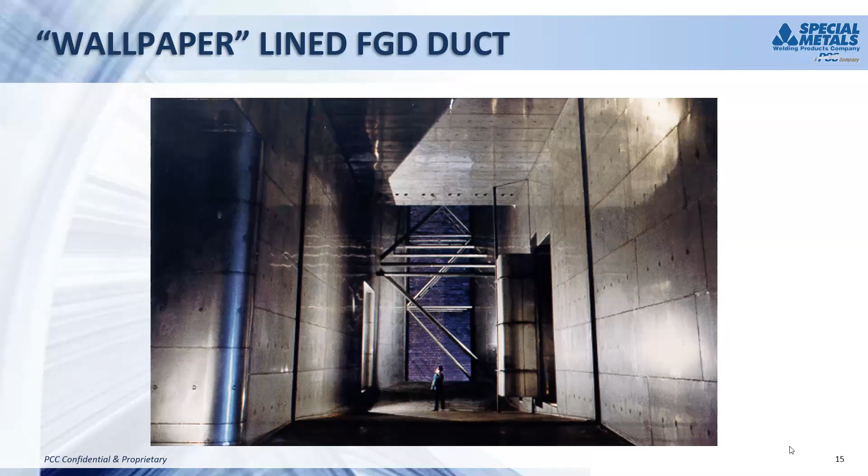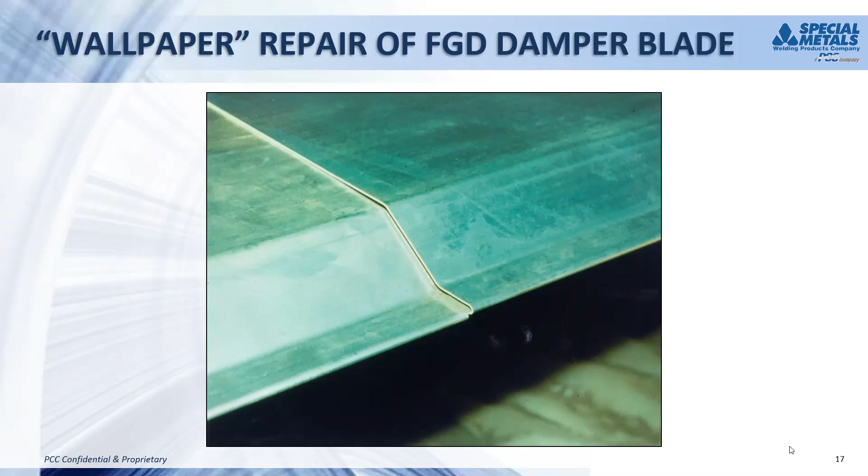This slide shows the various techniques that can be used for wallpapering. The objective here is to be sure that the service weld is not exposed to iron dilution. In the first scenario, you see the sheet has been welded to the steel substrate, and that weld obviously will be diluted with iron. But in the next weld, the sheet would overlap the existing sheet, and that weld would be an alloy to alloy weld. So the service weld is not diluted with iron.

The next two scenarios show how a batten strip can be used to cover the diluted welds. In technique number 2, you can see 2 sheets are welded to the steel substrate. Those welds would be diluted, but then a batten strip of the same alloy is welded over top of those welds, and those service welds would not be diluted. Situation number 3 is basically the opposite, where the batten strip itself is welded to the steel substrate, and then the next 2 sheets overlap the batten strip, and those welds again would not be diluted.

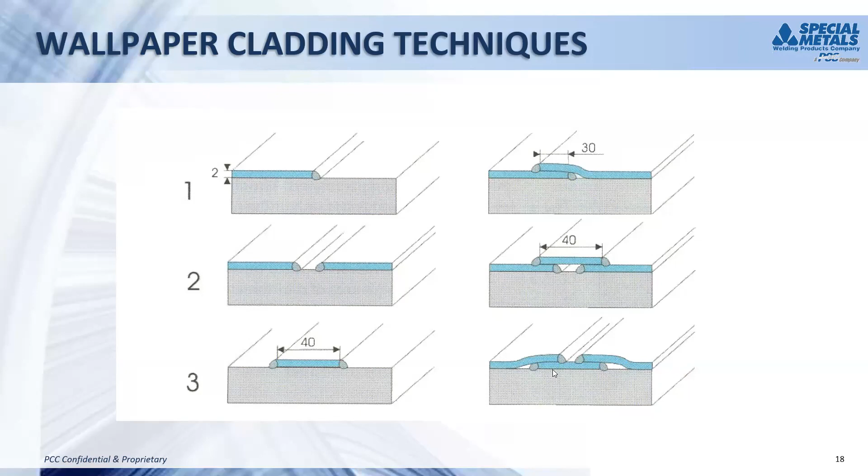The next slide gets into material selection. The schematic I showed you earlier showed the various sections, and we had green sections that were moderately corrosive and red sections that were severely corrosive.

In the moderate section, and this is usually the scrubber vessel itself, some of the advanced grades of stainless steels have been used. These are the superaustenitic stainlesses that are modified with nitrogen. They typically contain about 6% molybdenum, and we make 2 of them. One is called INCOLOY alloy 25-6MO, and the other one is 25-6HN.

We also developed an advanced grade of superaustenitic stainless called INCOLOY alloy 27-7MO. While it's only slightly more highly alloyed than the existing products, the corrosion resistance actually approaches that of alloy C276, yet the cost is only about 60% of that. So if you can use these products, their cost is considerably lower than a higher nickel alloy.

But in the severe areas, the outlet ducts, inlet ducts, and the chimney flues, those almost always have to be fabricated from a nickel base chrome moly tungsten type alloy. Alloys like C276, 22, and Inconel 686 is our most highly alloyed, most corrosion resistant material, and it has found applications within FGD systems.

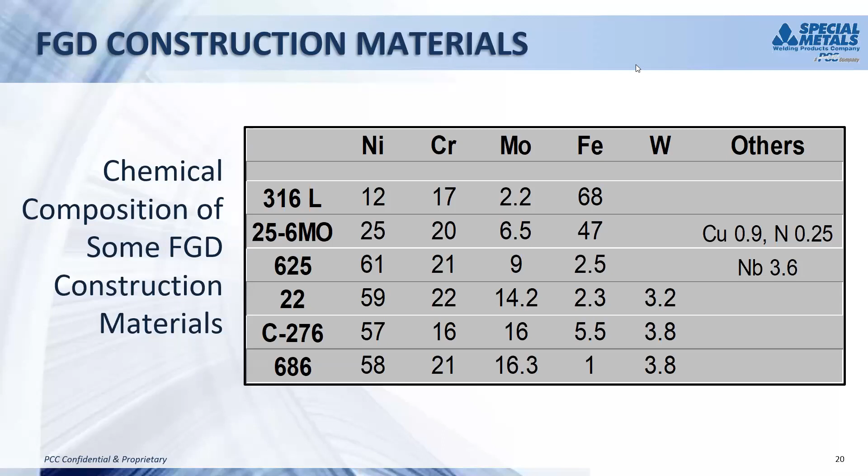The next slide just demonstrates how much the corrosion resistance of these materials can differ. This was in an outlet duct in a power plant in Florida where it was very hot. The duct was originally fabricated from alloy C276, but due to a leaky damper there was quite a bit of leakage of the acidic environment into that duct, where it became very hot and it was attacking the C276 very quickly.

We installed a 4-sample test piece with 4 alloys to see how they would perform. The upper left-hand sample is alloy 686. The other 2 adjacent to that are 22 and C276. In the lower right-hand corner, there was a sample of a superaustenitic stainless steel, INCOLOY alloy 25-6MO.

After 6 months, you can see that that sample has completely corroded away. In this case, the 686 was not corroded, and there was initiation of localized attack in the 22 and the C276. So I guess the message we could conclude from this is that a higher alloy provides much more corrosion resistance than a lower alloy.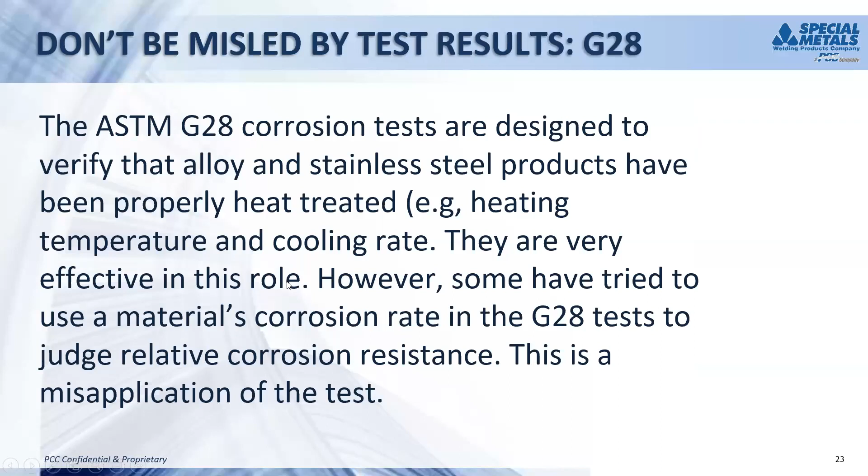The next slide - I would caution you that some people have tried to use existing corrosion tests to compare materials for FGD service. This is a misapplication of the test, and it just simply doesn't work. The next slide shows the general corrosion rates that you see with an ASTM G28 method A corrosion test.

The corrosion resistant alloys and stainless steels have to be in the right condition to provide their optimum corrosion resistance. They have to be annealed properly, and they have to be cooled properly after annealing. The G28A test is designed to verify that products have been properly heat treated.

When you're testing material, you compare the rate you get to the base rate alloy, and if it matches, you know it's been properly heat treated. But if you try to compare alloys to each other, you'll get erroneous results.

If you notice, C276 has the highest rate of any of the materials in this list. In fact, the 3 highest are the 3 most corrosion resistant materials - nickel, chrome, moly, tungsten materials that we know work very well in FGD systems. The 3 lowest rates are 316L, a super austenitic, and alloy 625, and we know these materials do not have nearly the corrosion resistance of the nickel chrome molys. So you can see you get erroneous results by trying to use that type of information.

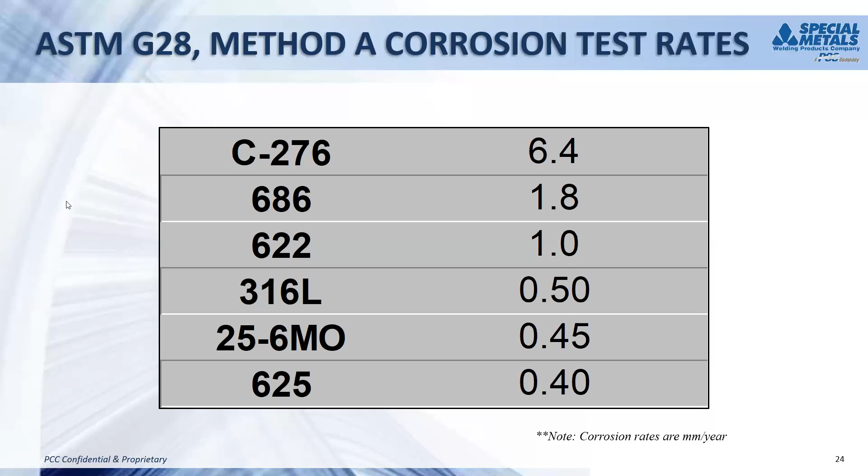The next slide - the ASTM G48 test, which looks at localized corrosion, has also been tried. While it might be a little bit better test than a G28 to compare materials, you can still get erroneous results. The G48 test is conducted in a solution of 6% ferric chloride, which is a very highly oxidizing salt.

The next slide shows the results of two nickel-based alloys and why this test is not really valid for what we're talking about. The oxidizing salt, ferric chloride, is quite different from the environment within an FGD vessel.

Typically, the media inside an FGD system will be reducing, so the oxidizing nature of the ferric chloride is somewhat different. In general, materials with higher chromium provide better corrosion resistance to oxidizing salts and acids. So alloy 22 with 22% chromium does indeed provide better resistance in this test - a higher crevice temperature in degrees C compared to alloy C276.

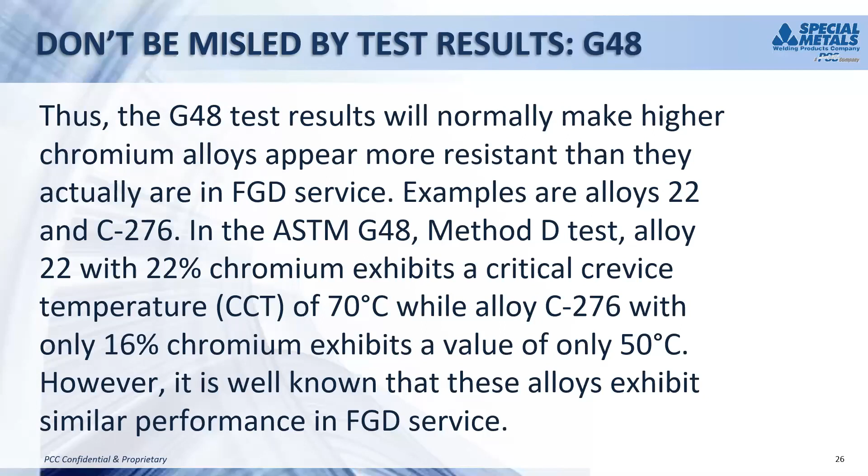Nickel chrome moly corrosion resistance alloys are fairly complex materials. The elements that make them up can form second phases if they're not properly processed, which can deteriorate the corrosion resistance as well as the mechanical properties and fabricability of the materials.

We see mu phase in the nickel chrome moly alloys. Some of you may be acquainted with sigma phase in some of the other alloys and stainless steels. But the presence of these secondary phases is definitely deleterious to the properties of the material.

So my suggestion would be, if you're using these materials, stick with the ASTM specification for the chemical composition. We've seen cases where a customer has asked for increased molybdenum content or different variations on our standard composition with the idea that they think they can improve the corrosion resistance.

But the fact is, for example with C276 or 22 or 686, if the molybdenum gets too high, then you start precipitating mu phase, which actually decreases the corrosion resistance. So leave the chemical composition to the existing specs and the experience of the metal manufacturers.

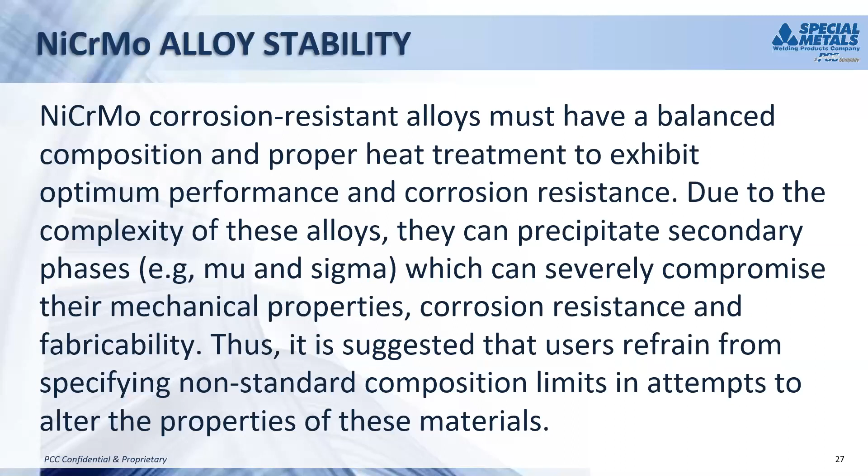The next slide. Obviously, if we're building these systems out of corrosion resistant alloys, we want the welds to be as corrosion resistant as the base metal. The nickel chrome molybdenum welding products can suffer from the effects of elemental segregation during solidification.

Molybdenum and tungsten melt at very high temperatures. Thus, when a weld is solidifying, those elements are the first materials to solidify. So the part of the weld that solidifies first will be enriched in molybdenum and tungsten, whereas the material that solidifies last will be depleted of those elements.

So you can see some variation on a micro scale across a weld due to these elemental segregation effects. The best way to offset that is to use an overmatching composition welding consumable.

Typically, stainless steels, the superaustenitic stainlesses, and some of the lower alloys like 904L have been welded with filler metal 625 or filler metal 622, both being overmatching in composition to the base metal.

For the other nickel chrome alloys like alloys 22 and C276, we suggest the use of IncoWeld 686 CPT welding consumables. In this case, even with elemental segregation, with our higher alloy content, you still get a weld that is matching or even overmatching the corrosion resistance of the base metal.

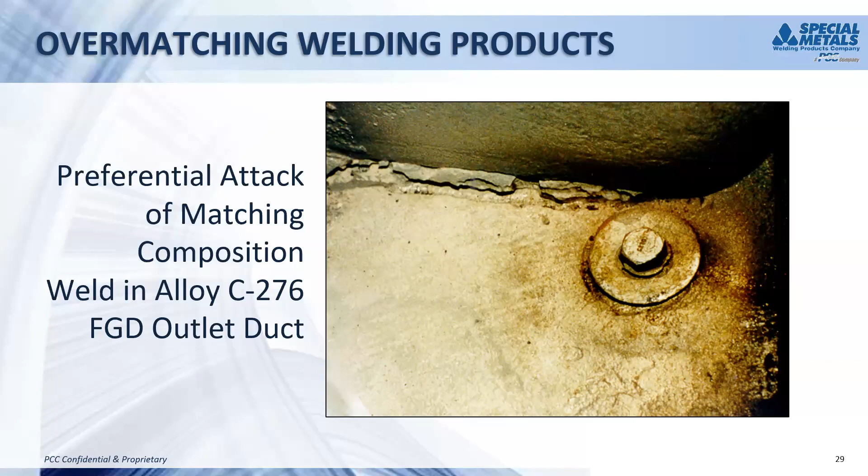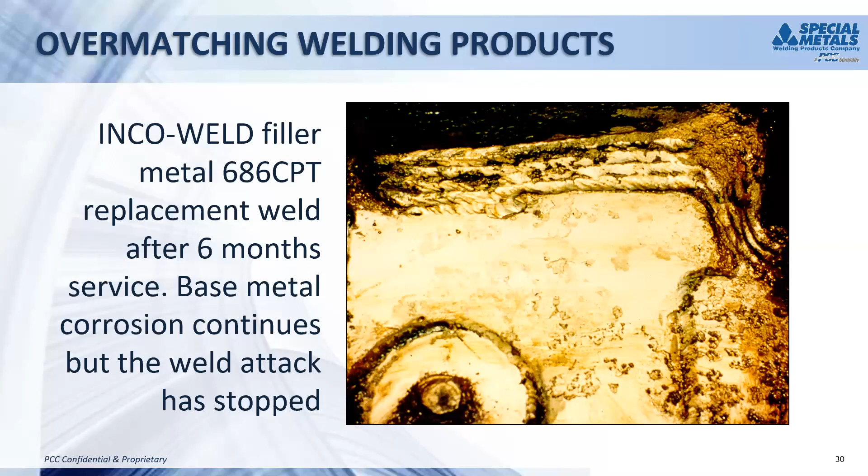There's certainly attack of the base metal as well. The next slide shows, in an attempt to repair that, the weld was replaced with filler metal 686 CPT. After 6 months, that weld is in good shape. We're not seeing any corrosion there, but the base metal is continuing to corrode. So based on the result of the 4-sample test we exposed, plus the performance of the 686 CPT filler metal, that duct was relined with alloy 686 sheet, welded with 686 CPT filler metal, and the corrosion stopped.

The next slide. In Brian's presentation about cladding, he mentioned iron dilution, and we can encounter that same problem in FGD systems if we're welding alloy clad steel plate or using the wallpapering technique. In either of those cases, there's potential for dilution of the weld with iron from the substrate. To avoid that, obviously we want to use a procedure that minimizes the iron dilution, but if it does occur, we would suggest the use of an overmatching composition filler metal to counter that iron dilution. That way, even if some iron does get into the weld, it still has full corrosion resistance.

So just to summarize, the next slide: what does it take for a successful FGD design and fabrication? Obviously, we need to understand the corrosive conditions that exist within the system and the requirements of service. Based on that, we need to make the proper alloy selection for the specific environments in each of the components of the system. And we need to choose a welding product and process that will deposit a weld that has good corrosion resistance for the environment.

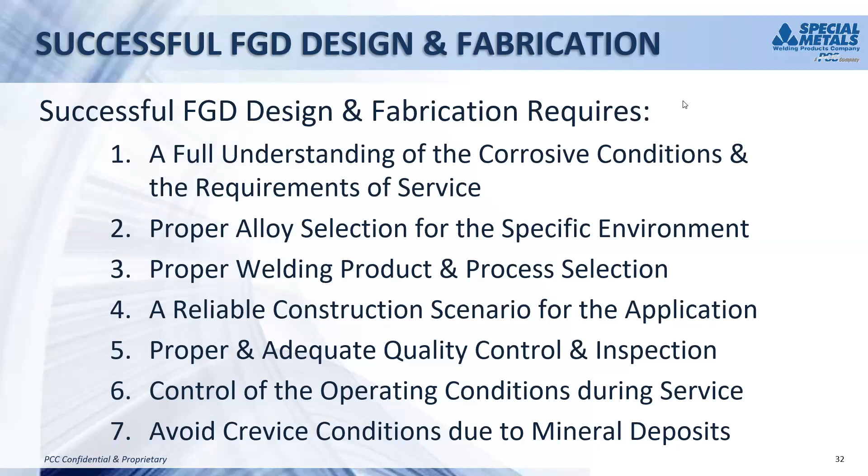And now I think we have time for some questions and answers. Krishna will take over. Dr. Krishna will have a question and answer session. Mr. Girotra, I would request that while John and the team decide which questions to take, if we have Mr. Ernest with us, he could share a few words while you choose the questions, because there are about 83 questions. I'm not sure we'll get through all of them, but it was a brilliant session, and that's why so many questions. So let's get Mr. Ernest to say a few words while you choose a couple of questions each. So we're extending the session — by how many minutes, 20, 15? As long as people are there, Mr. Girotra, it's not a time session. Let people stay, and as far as they're comfortable answering a few questions, we'll take them and move forward. Good, thank you. So let Mr. Ernest say something. Okay, very good. So thanks, guys, I'd first of all like to thank you for your kind attention. The guys were really excited to do this seminar today, and I think we shared a lot of different information. There are a lot of questions, so we certainly will stay.